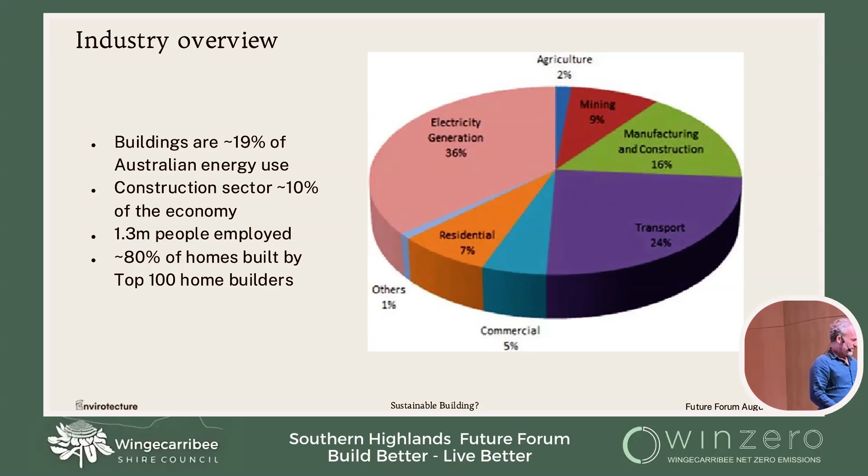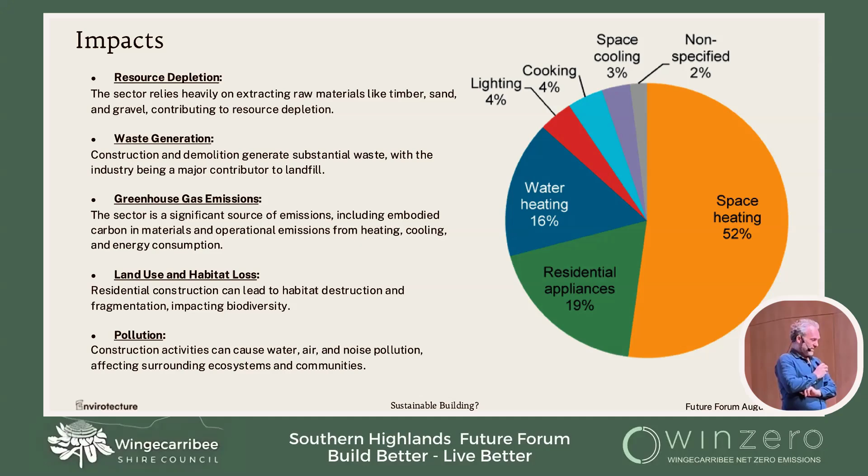So we build the largest houses in the world. Arguably, we build the cheapest houses in the world, if you measure that by per square metre, but that isn't what really translates into real world impacts in terms of your mortgage, because it can be a very cheap house per square metre, but if there's 500 square metres of it, it still adds up to be a very large amount of money. And so does this need to change?

We are supposedly, according to our federal government, building 1.2 million homes in the next 5 years. Anyone who's paid attention knows that that won't happen. And there's many reasons for that, and they're not really worth going into, but we can talk about it later if you'd like. It is safe to say that we need to build more homes. Whether we need to build 1.2 is a whole other can of worms, but we do need more of them because our population is still growing at quite a rate.

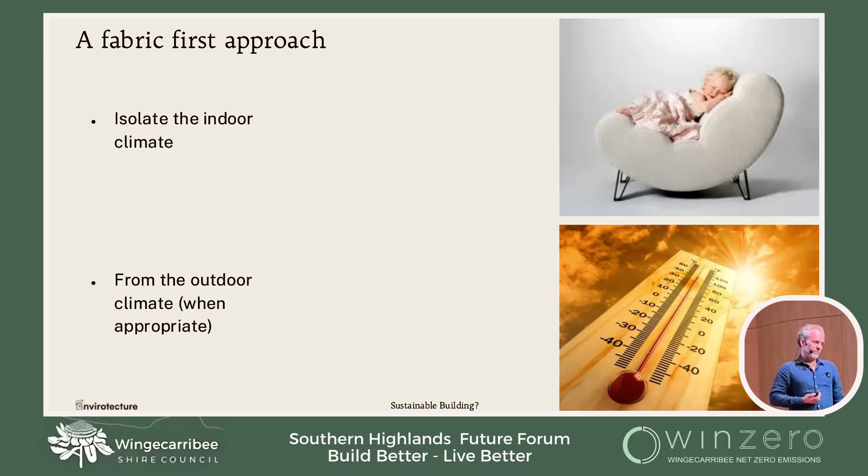This is an ad from the Passive House Network, which is a North American organization that promotes passive house standards. They've got a whole series of these. They're very clever. And they've been putting these out for about a year or so now, maybe 18 months. This came after, unsurprisingly, the massive fires through LA, but also with a lot of the other bushfire events, or wildfire events as they call them, that have been happening in the States.

And the idea of this isolation of the outside and inside and being able to be separated becomes incredibly important during these bushfire events. There's great Australian research on what happened during the Black Summer bushfires with houses that were airtight versus houses that weren't. There's a lovely article in Renew magazine or Sanctuary, I forget which magazine it was in. But anyway, all talking about that. I can give you a link if you want. But the importance of having an airtight house, or a smoke tight, as the Americans are choosing to call it, during significant outdoor pollution events is really important.

And obviously the bushfires were a very big, very scary thing and very hard to avoid. But these same principles apply if you have a neighbour who's got a fairly terrible, inefficient wood stove bellowing out smoke at 4 o'clock in the afternoon, then you've effectively got the same pollution problem indoors as you have in the middle of a bushfire event. It's just somewhat more localized. Not necessarily much you can do about that. No one's keen to ban wood burning stoves at the moment for whatever reason. And so smoke tight buildings, fabric first buildings are one of the solutions to that.

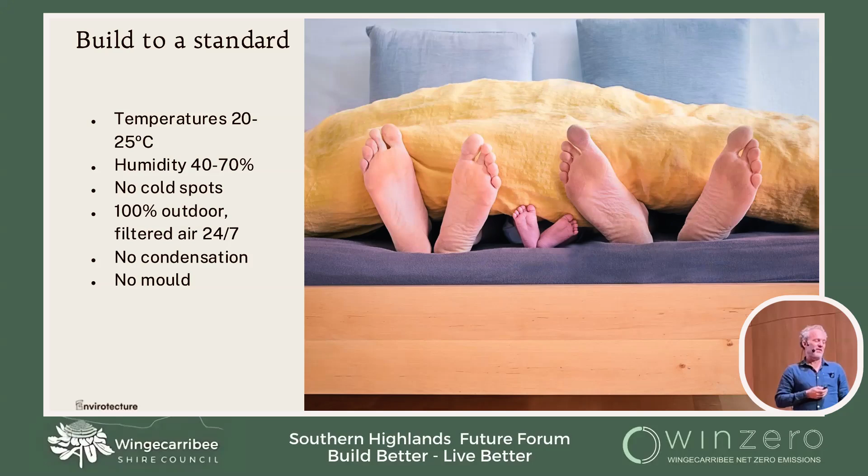Now, it turns out that those definitions, we didn't make those up ourselves because we think we're clever, but we're not that clever. These are the headline metrics really that sit within what is known as the Passive House Standard, which originates out of Germany. And I will talk about that in a moment. The other component of what to build is quality.

I would argue quite vehemently, and for days if you'd let me, that the main crux of our housing crisis in Australia is actually a crisis of quality. Whether it's apartment buildings that may or may not fall down, like Mascot Towers, or apartment buildings that catch fire, as in Lacrosse in Melbourne, we have a quality problem. Whether it's your bathroom that leaks, or the gap between your window and the wall you could stick a finger in through, it's fairly hard to argue that we have a quality building stock.

And the performance gap mentioned up there, for those of you who haven't heard the term. All new homes in Australia are designed to meet a national standard, normally the NatHERS standard, Nationwide House Energy Rating Scheme, and it's got a bunch of star ratings to it and all that sort of stuff. That tells you theoretically how your building will perform, how much energy it will use to stay warm or cool.

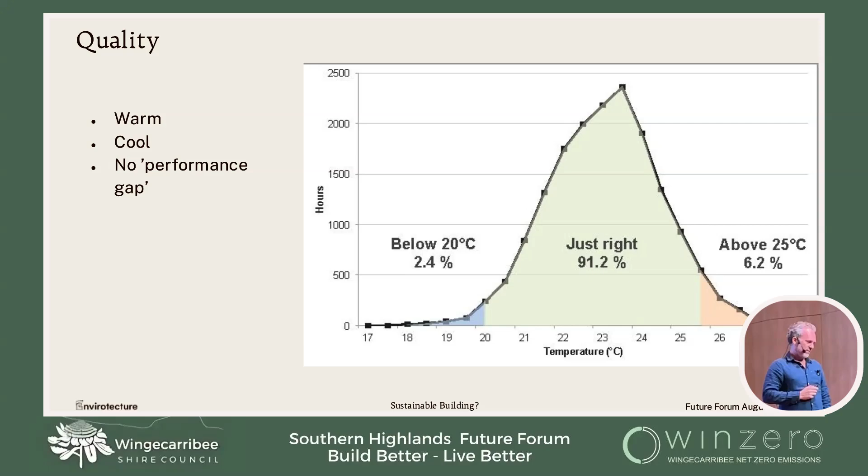And the performance gap is how everybody refers to the difference between what it says and what the building does. Depending on how things are measured, sometimes there's no performance gap. Normally there is one. Normally it's bigger than 50%. And so one of the biggest problems we currently face due to, in my view, the quality issue is that what you think you're going to get and what you get are wildly different. So I cheekily refer to the quality version as getting what you paid for, which of course is a polite way of saying that most people don't, which is sad in many ways. So if that's what we should be doing, there's a logical question about how to make it.

So in our work and the Passive House Standard generally, there are acknowledged to be these 5 building principles. Most of you may or may not be familiar with them. So, appropriate levels of insulation. What does that mean? Well, it depends where you are. It depends on your building type and shape. So the answer to that question is not necessarily simple, but in the Highlands, for example, you would want to insulate under your concrete slab if you had one, because you don't want to lose heat to the ground in winter.

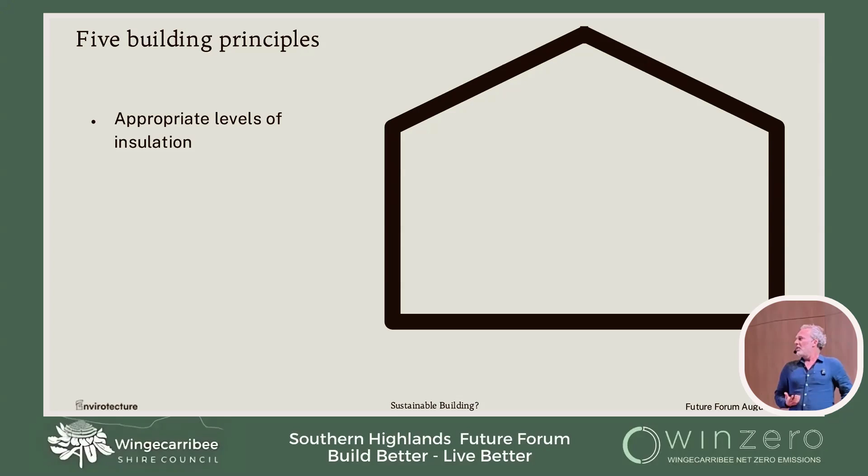We're aiming for airtight construction. And it can be scary. Airtight construction is fundamentally about control. We want to be able to control the flow of energy in and out of the building so we can accurately predict it. As soon as we can accurately predict how the building will perform, we can also optimize the building to make it as efficient from a cost perspective as possible.

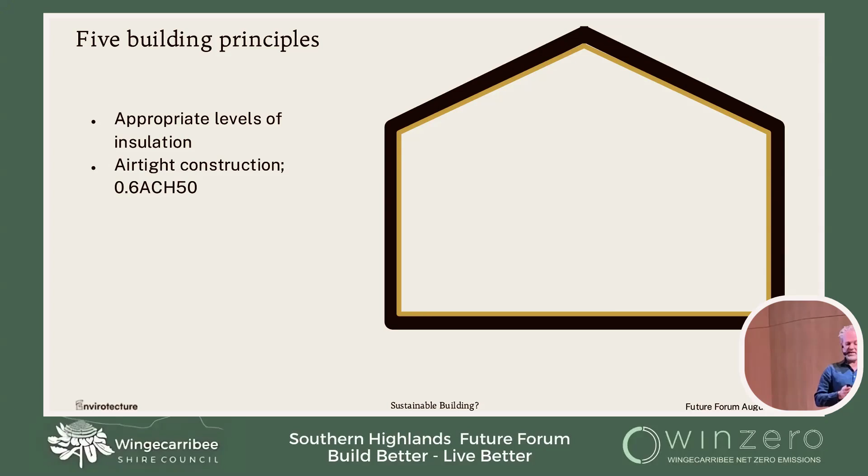Because if it's airtight and predictable, we can tell you that if you were to remove a certain amount of insulation or add a certain amount, it will get X% better or X% worse. And then you can decide whether that's good or bad value. The airtight construction is the part that makes all of this come together. You may have a niggling thing in the back of your head. We'll come to that.

Minimizing thermal bridges. Thermal bridges are not particularly sexy, but they are literally the thermal highway that goes from inside your building to outside. So that means that in winter, they will bring cold from outside to in, and in summer, they'll bring heat from outside to in. In summer, that makes your house hotter. Turn on the aircon, she'll be right, maybe, but not particularly pleasant.

In winter, cold surfaces inside your building generally mean condensation, which generally leads to mold, which leads to health issues, productivity, all the other things. They are incredibly important. What are they? In most buildings, it's steel, concrete, and aluminium. Steel and concrete are very useful building materials, and therefore we're not trying to say you shouldn't use them, although if you can minimize them, there's other reasons that would be good.

But basically, when we use them, keep them inside the building or outside the building, not in and out at the same time. You can do things, and we've done them, where you have steel that goes from inside to outside, but they're painful and expensive and cost time and more money to do. And it's better to avoid it when you can. Aluminium's probably the most interesting. Aluminium's a fantastic conductor of heat, which is exactly what you don't really want in a window system, for example, and yet it's how most of our windows are made.

You can get thermally broken aluminium windows, which are basically two windows stuck together with a bit of plastic. They're fine too. But again, there's differences in what is thermally broken and what isn't. And there's a whole gulf of marketing stuff that seeks to confuse that issue for most people. We're trying to minimize these thermal bridges. It doesn't mean we need to eliminate them all.

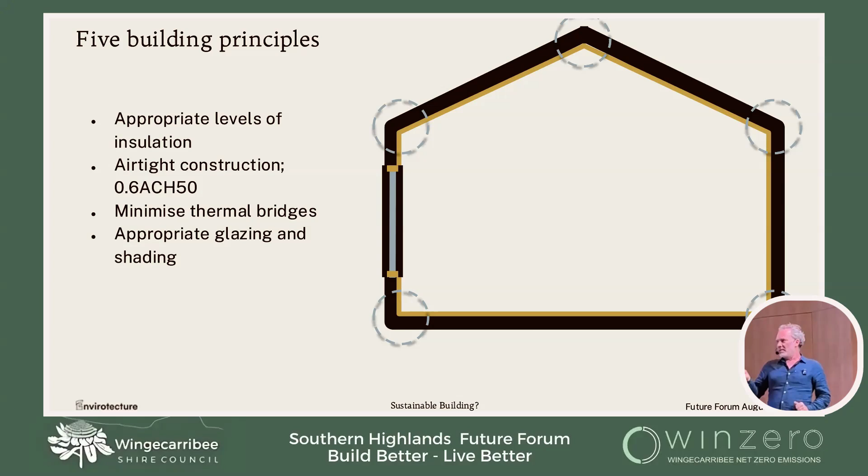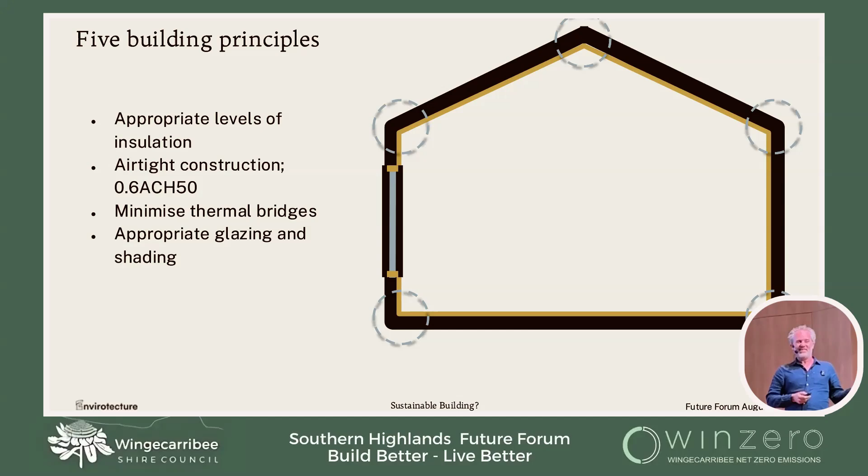This is part of the process of design to optimize the building to get the best bang for your buck. Bang for your buck is common, of course, because that brings a conversation about value and what do you value. And value obviously has a financial component, but it's also got your other values in there, and they're much harder to replicate. The final piece of the 5 principles puzzle is mechanical ventilation with heat recovery.

So for those of you that at air tightness went, oh my God, how am I going to breathe? The answer is you'll be fine because it's not perfectly airtight, because almost nothing is. So you'll never die. However, without something like mechanical ventilation with heat recovery, you would end up fairly quickly in a mold-ridden, very damp house. And that's because you're human. And this is good, because if you weren't, then it'd be a weird event. But you breathe, you probably shower, you probably cook food, and you possibly hang your laundry inside at this time of year because it's too cold outside to dry in a sensible time frame.

All of those things release moisture into your building. If there's no way to get rid of that moisture, it will just stay in your building because that's what it'll do. At some point, the surfaces of your building in relationship to the moisture in the air will eventually hit a point where condensation will start to form and mold will start to form on your walls, whatever, surfaces inside.

This wonderful magical box basically delivers this outdoor filtered air into your building whilst throwing out the other air at the same time. So it's what we call a balanced system, equal amounts in, equal amounts out. And it distributes it around the house. So it sucks air from wet places, bathrooms, kitchens, laundries, and it supplies air to places where you spend time. So living rooms, bedrooms, study, anywhere that's not wet.

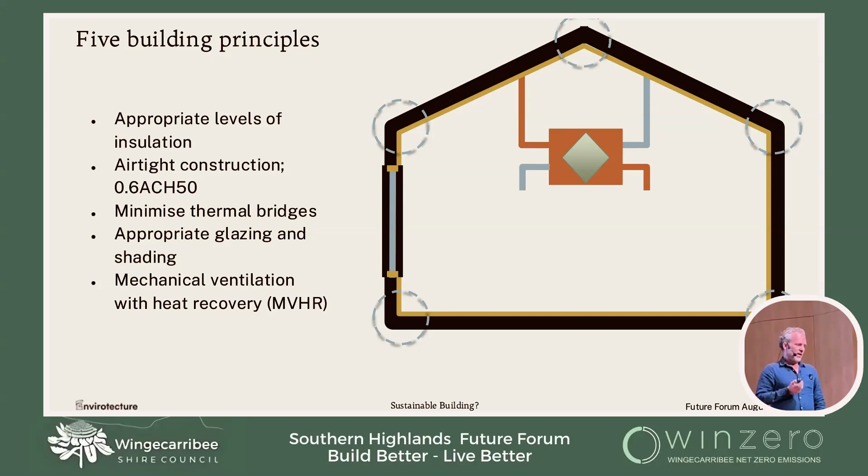So they are the 5 principles of building, what are colloquially known as the 5 passive house principles. We talk about passive house having 8 principles. It's got these 3 principles of approach because those 5 things I've just spoken about, you could do all of those things, but without targets, metrics, a quality assurance scheme or a modelling process, you don't know whether you've got enough insulation, too much glass, not enough glass, enough shading, not enough shading, is the ventilation system right? So you need a way to bring these things together to give a guaranteed outcome.

So these 3 principles of approach have performance and comfort criteria. So the 20 to 25 degrees, the no cold spots for the mold, having those things is incredibly important. The modelling process, this Passivhaus Planning Package, try saying that after a few glasses of red, is the modelling system we use to actually understand the building, to see how it works. That's how we get to optimize the building, to be able to make something bigger or smaller, or put more insulation in, or take something out. So that process facilitates understanding how it performs in those comfort criteria.

And then the final part is quality assurance. So it's fairly safe to argue that the whole passive house building standard is a quality assurance scheme. It's dressed up as a building standard. It's dressed up as an energy standard. It's really about health and comfort, but it's really a giant QA scheme for building.

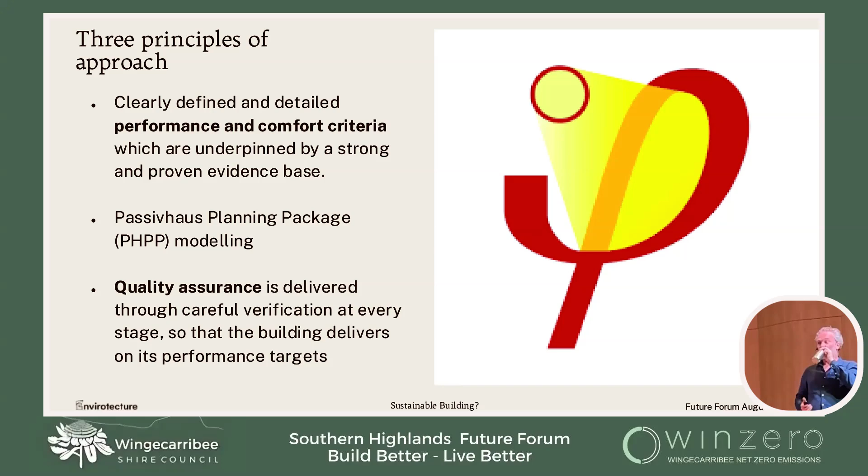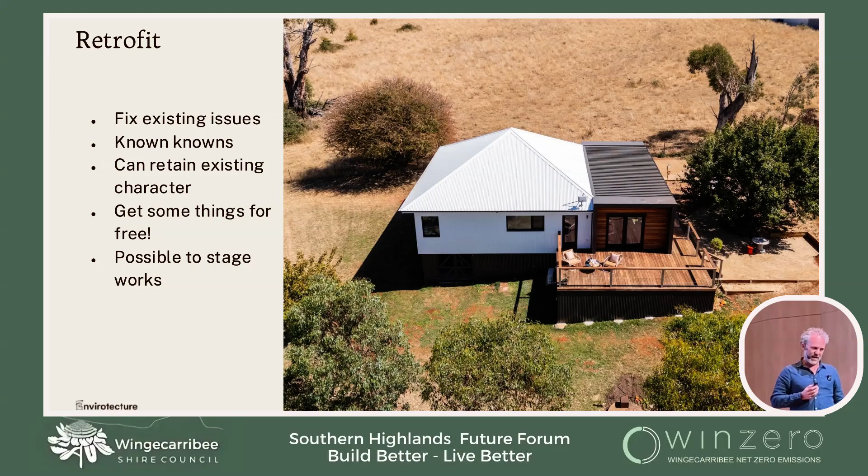This is one of my favorite hobby horses. I won't dwell on it for too long, but if anybody wants to come and talk about it after, I'm very happy to jump in this rabbit hole. This is all around upfront carbon or whole life carbon.

And the current way that things are structured massively incentivizes just throwing a whole bunch of solar panels on the roof of your house and then just air conditioning the bejesus out of it, and she'll be right. And depending on what you're measuring, and certainly financially, that's the best thing you can do. If you care about health and comfort, it's an entirely different conversation. But money-wise, this thing wins hands down every time.

But the other thing that's really interesting is because if you only do the PV option, you end up putting on, depending on the climate and a few things, about twice as much solar. So you need a big enough building to put twice as much solar on. So your upfront carbon in additional solar is big.

And also you need a much bigger air conditioning system because you're trying to fight, in this case, the orange climate in a crap building. And therefore, everything's got to be bigger and consume more power in order to be able to overcome the fact you didn't fix the building. So from a carbon perspective, if that's what you care about, then it's much better to retrofit the building.

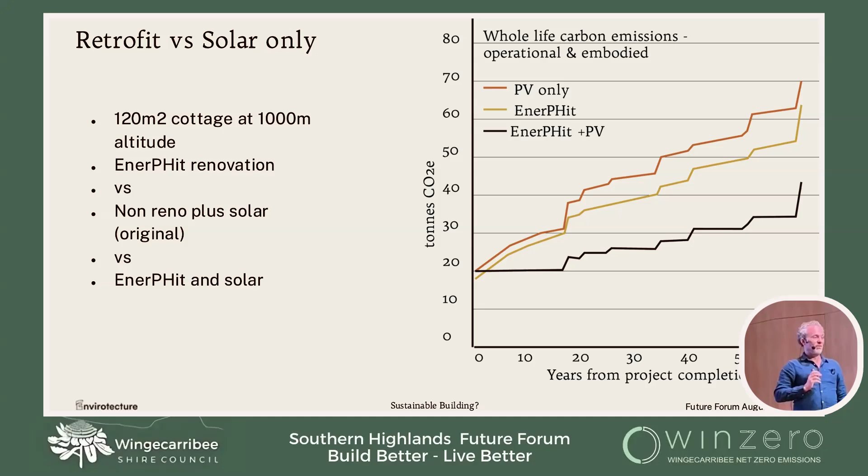For each of those prices, we managed to pull apart how much of the building was to do with the performance of the building. And so by performance, what we're really referring to is the walls, roof, floor, insulation, airtightness, mechanical ventilation. So the things that make your building work in terms of health and comfort and energy efficiency. So it's not tiles, bathrooms, kitchen. It's not builder's margin. It's not scaffold. It's not painting. It turns out that somewhere about a quarter to a third of the cost of the building is to do with the performance of it. The rest of it is all those other things.

You can't necessarily get away from all those other things, but what we learn from it and what we think is the important takeaway from it is that the cost of building well is not the problem. At the moment, the cost of building is a problem. It's become much more expensive than it was. It's never been particularly cheap, but the cost of building well is not the source of the issue. And as certain people in the media decide that they would like the building code to freeze and never change again, we think that's fairly short-sighted and dumb, to be honest, because it's the cost of building that's the issue. Cost of building well is not the source of the problem we currently have.

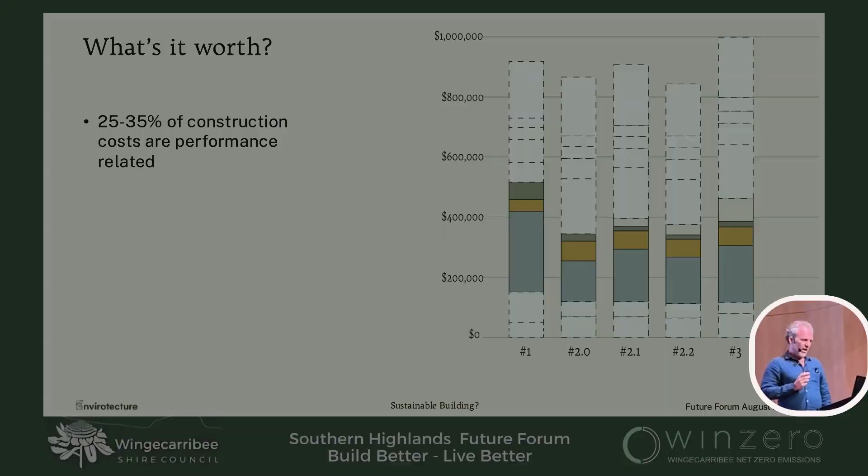If anyone's next question is, could I just move a wall? Then the answer is, that's great. Come to Envirotecture, we'll custom design you anything you like. These things will be yes, no, very much pre-designed, it's all locked in. This is why it can be cost effective. We've been down this road with a bunch of people over the years, mostly other builders and prefab firms. And we know that the changes are the thing that make things expensive. And so for a certain group of people, this is going to work. Whether it's a big group of people, we don't really know, but we thought it was worth a crack.